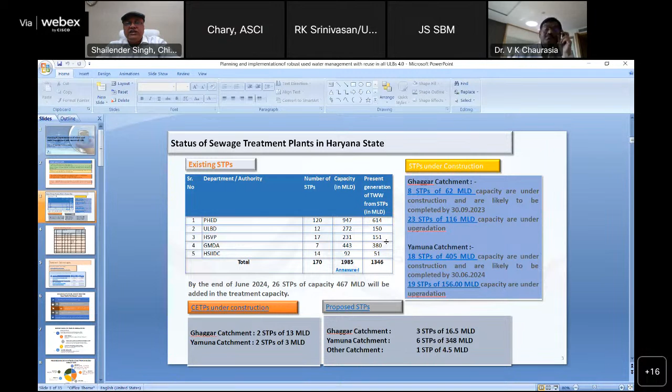We are having STPs under construction also. We are upgrading our STPs, which were earlier designed for 30 BOD, but now we are upgrading those STPs also for less than 10 BOD and other standards.

Then we have these are the standards which we are planning while constructing our STPs. The norms have been prescribed by Haryana State Pollution Control Board, and these are same as per the NGT orders of 2019.

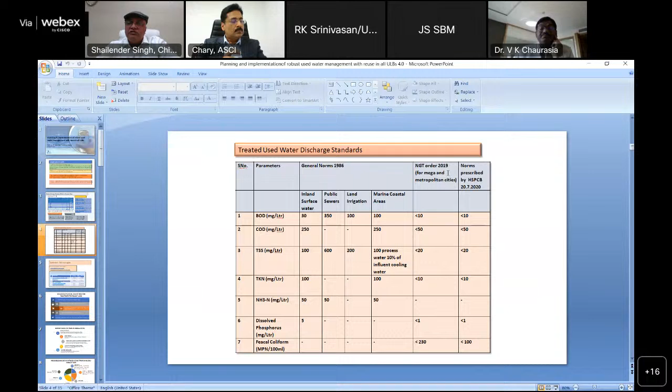This is the breakup of STPs. We are having two STPs of UASB technology, which was the old technology. Then we have activated sludge process, two STPs. Most of the STPs are of MBBR technology, and 36 STPs are of SBR technology. These MBBR technologies, since we have to use this treated wastewater mainly for agricultural purposes, so we are upgrading these STPs also.

This is the brief highlights of our wastewater policy. The aims are maximizing the collection and treatment of sewage. Second aim is to promote the treated wastewater as an economic resource. So we have fixed the charges also for wastewater supplies.

Treatment of collected sewage is done as per the prescribed standards by Haryana State Pollution Control Board. We target to treat 100% of the collected sewage and progressively increase the reuse rate to 50% by 2025 and to 80% by 2030.

Now, what is the importance of treated wastewater in irrigation? Haryana is basically an agricultural economy, and in the smaller towns, of which there are about 70, there is not much industry, so the adjoining areas are agricultural land. We are targeting to use treated water for agriculture purposes, since agriculture accounts for the highest percentage of annual freshwater withdrawals.

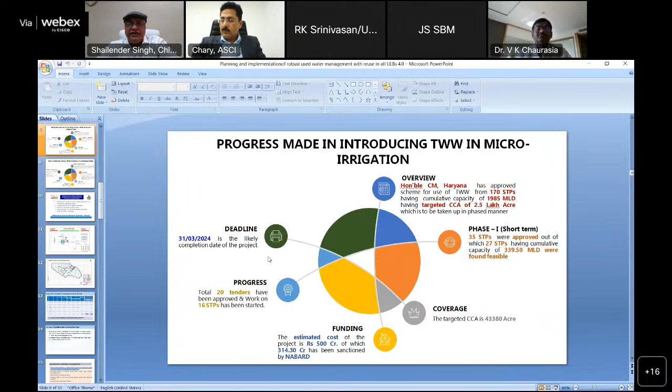In the second phase, we will take up 57 STPs, completing it by 2025. In the third phase, we will take up all the remaining STPs, with a target date of 2026. So we will be achieving our targets well before the dates stipulated in the policy.

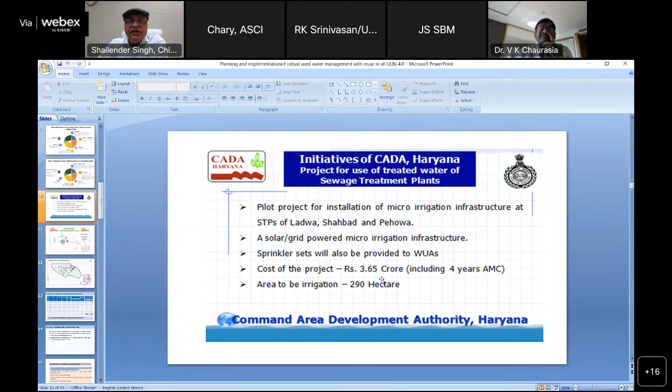There is an authority called the Command Area Development Authority in Haryana, which takes water from our STPs and distributes it to farmers through micro irrigation. A pilot project was taken up in Ladwa, Shahbad, and Pehowa, where a solar system was provided for electricity supply, and sprinkler sets were given to the water user associations. The cost for these 3 towns was about 3.65 crores, and the area irrigated was 290 hectares.

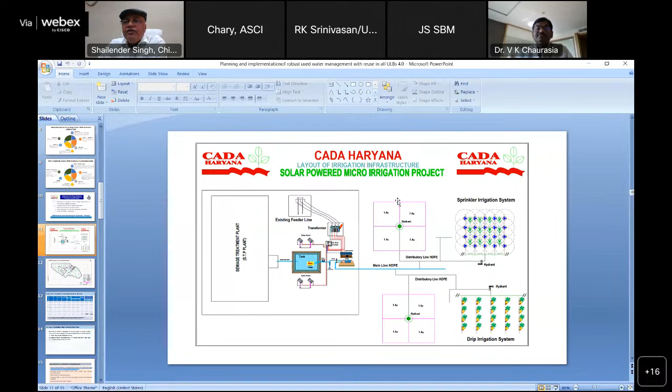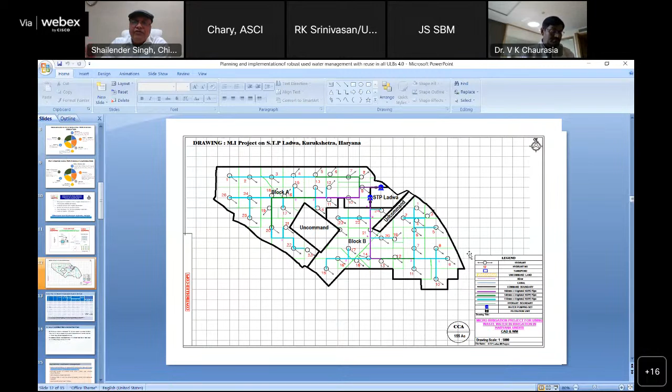This is the total command area. If we go in for micro irrigation, it is seen that about 1 MLD of treated wastewater is able to irrigate about 170 acres of land. So a considerable amount of raw water running in the canals is saved by using treated wastewater and supplying it to the fields through micro irrigation.

This is again the action plan, shown here in figures. I'll not take much time on it.

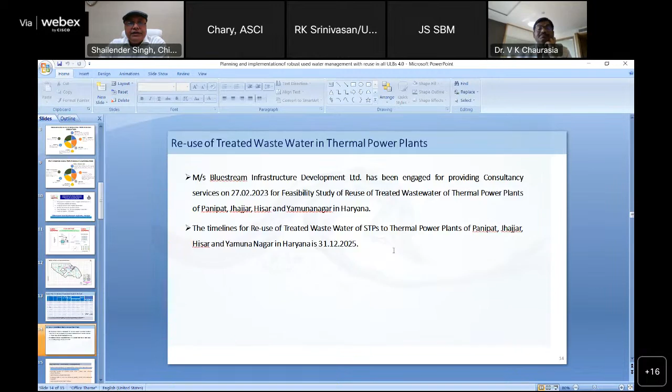Now I'll stress upon some of the key points for used water management.

Some important key points are that, first of all, we should fix and notify standards for use of wastewater depending upon its usage, as we have to identify for which purpose the wastewater is going to be used. Though the CPHEEO manual specifies that if water is used for raw vegetables it should be treated to a certain extent, and if used for industrial purposes a different level of treatment is required, these standards are not yet notified.

The state pollution control boards should come up and fix the standards for using this water, so that accordingly the STPs can be constructed. Second is ensuring that these standards are met through our STPs.

There are many challenges of O&M, and we see different kinds of influent characteristics coming at our STPs at different times. In industrial towns like Panipat, there are lots of dyeing industries, so sometimes there's green water coming, sometimes red water. So we have to monitor this influent coming into the STPs also.

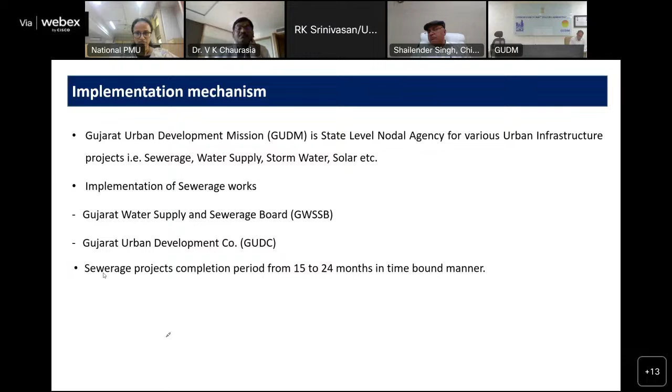In order to maintain quality control and to complete the projects within a time-bound schedule, project management consultants and TPI are deployed to observe quality controls and completion of projects in a time-bound schedule.

Planning before implementation requires demand gap based planning, budget plan, detailed project reports, drawings and estimates, resolving existing utilities issues, and statutory approvals from various authorities prior to execution, approval of projects by GUDM, and implementation of projects.

Operation and maintenance: minimum 2 years for network and minimum 5 years for STPs are provided in the estimate.

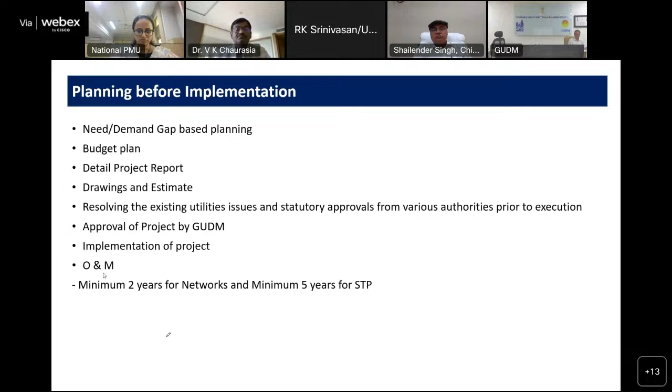Current status of STPs. Municipal corporation waste generated is to the tune of 3,268 MLD, existing installed capacity 4,010 MLD, wastewater treated 3,066 MLD. Municipalities: 1,146 MLD generated, existing installed capacity 744 MLD, and wastewater treated is 343 MLD. So total 4,414 MLD, existing installed capacity 4,754, wastewater treated is 3,409 MLD.

Commissioned STPs from year 2015 to 2023: 133 STPs of capacity 4,841 MLD. Work in progress of STPs: 104 STPs with capacity of 1,369 MLD will be completed by December 2023.

25 STPs with 990 MLD capacity will be completed by December 2024. The utilization of STP is directly linked to sewage network and household connections.

To improve collection efficiency, the government provides rupees 7,000 per sewerage connection. This 7,000 per connection is given from Swarnim Jayanti, and in addition, 3,000 is given by Government of India.

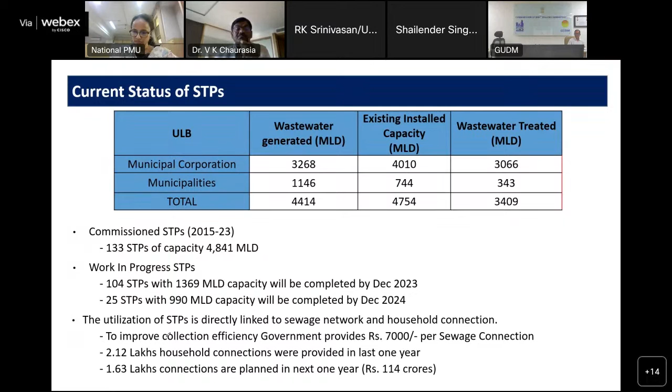So till date, we have completed 2.12 lakh household connections in the last 1 year, and 1.63 lakh connections are planned to be completed in the next 1 year.

Current status of collecting systems: in 7 municipal corporations, the collecting system has been completed and 1 is in progress. In Class A municipalities, total completed are 19 and 3 are in progress. In Class B, C and D, 126 are completed and 8 are under progress. So out of 152, work in progress is under 12 municipalities. We have covered more than 90% of the network in urban areas of all the municipalities.

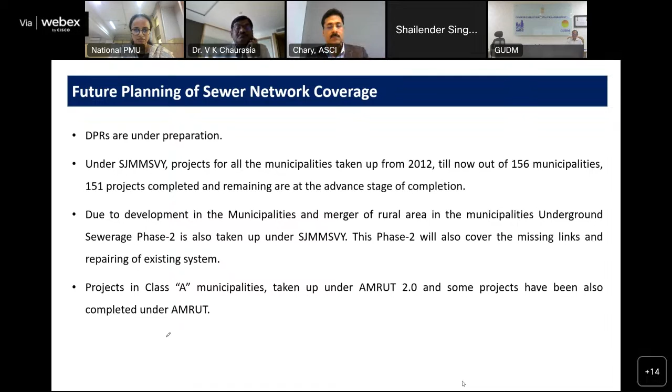The Government of Gujarat has launched a policy for reuse of treated wastewater on 28th May 2018. The objectives of the policy are to reach a minimum 80% coverage and collection of sewage in all municipal towns, to reach a level of 100% treatment of collected sewage as per prescribed standards, to reuse at least 25% of total freshwater consumption from treated wastewater within the time limit set under the policy, to reuse 70% of treated wastewater by 2025, and to reuse 100% of treated wastewater by 2030.

Thank you for giving me the opportunity to share the Gujarat experience.

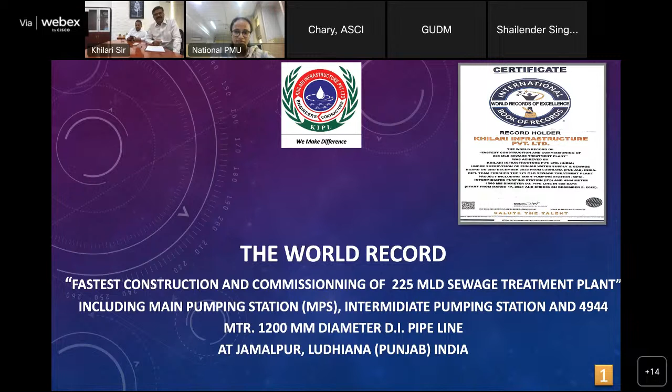The goal of this project was that the Buddha Nala, which was earlier a Budha Dariya, had become a Buddha Nala because of polluted sewage. The objective is to treat the domestic wastewater so that only treated waste and stormwater flows into it, and we get back to the Budha Dariya rather than the Buddha Nala.

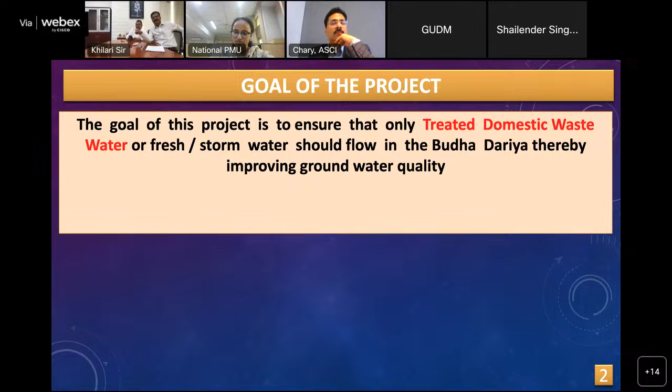This plant was inaugurated in the month of February by the Honorable CM of Punjab.

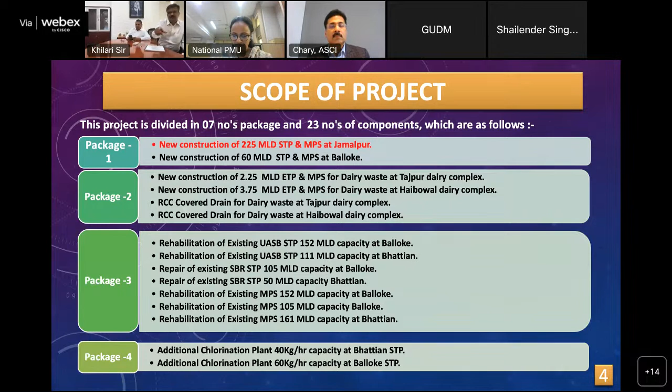These are all the packages. Basically, there are two STPs, 225 and 60 MLD, and there are other components. There is a package of ETPs. We had to rehabilitate the existing STPs also, and the chlorination system, and the package of what you call the IPS. Then again, rising mains packages, two packages of rising mains. Now, this is the main STP, 225 MLD sewage treatment plant and its components, with two IPS and the incoming sewer of 1200 mm diameter DI pipeline.

So we completed this whole scope in a record 625 days. This is in spite of the fact that this was during the COVID period.

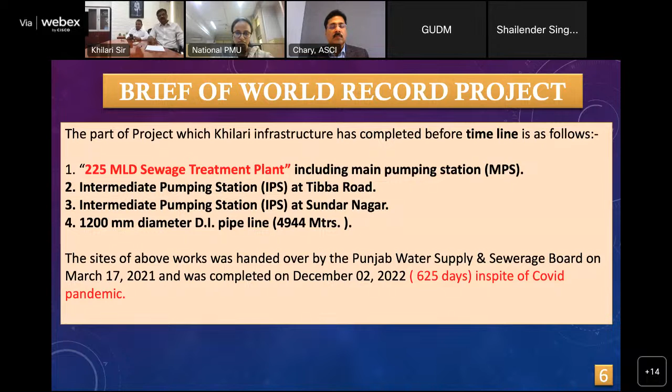So how did we achieve this 21 months target? Basically, the executing agency, PWSSB, we have been working with them for so many years, and they have probably executed around 100 STPs. So they have capable technical staff, and they were very flexible during the execution.

Similarly, the Ludhiana Municipal Corporation is also involved, as the end user. The chairman of Ludhiana Municipal Corporation is chairing the project monitoring committee with able members from various departments. The coordination and communication was so well managed because there were 5 agencies: PWSSB, Ludhiana Corporation, the technology provider, KIPL, and the consultant. All were in sync with each other, and there was no communication gap during all these 21 months.

Now, coming to the selection of technology. We have constructed around 1,000 STPs throughout the country. There is probably not many corporations who don't have our STPs, from across the whole country.

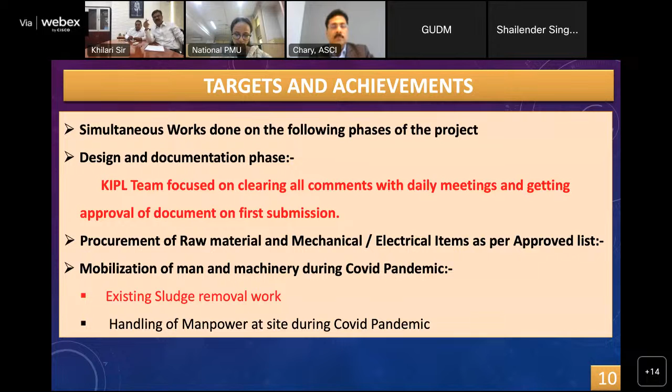Simultaneously, only 2 slides remain. We had to prepare the land development where there was a sludge of 1 lakh cubic meters, which was also cleared during this time.

Next slide. Of course, we introduced all the high-tech machinery and the whole team was incentivized. Parallel teams were deployed, along with specialized vendors for specialized equipment like the filter press and centrifuge; all the teams were invited to commission the plant and commission the units.

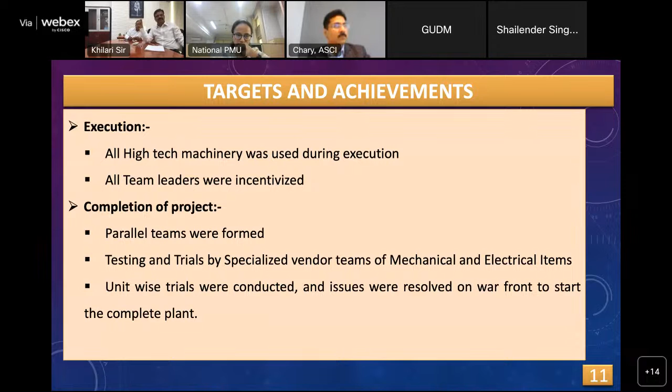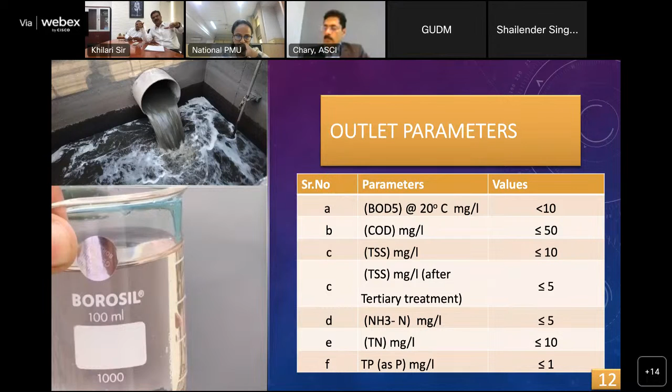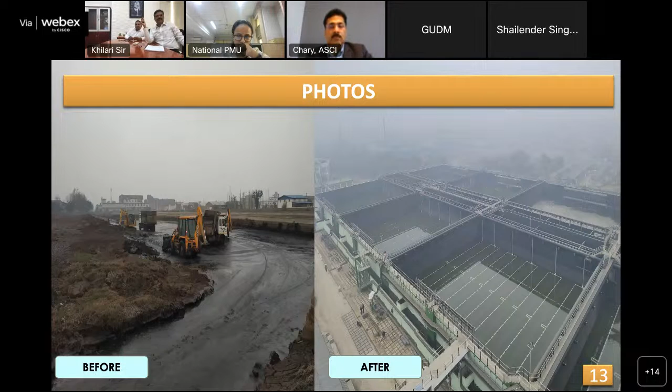This is the outlet quality - this is the recyclable quality, which is less than 10 BOD and TSS less than 5 after tertiary treatment. This is before, you can see a lot of sludge there, and this is the plant after it has been commissioned - this is the primary treatment, a huge primary treatment. And these are the final photographs.

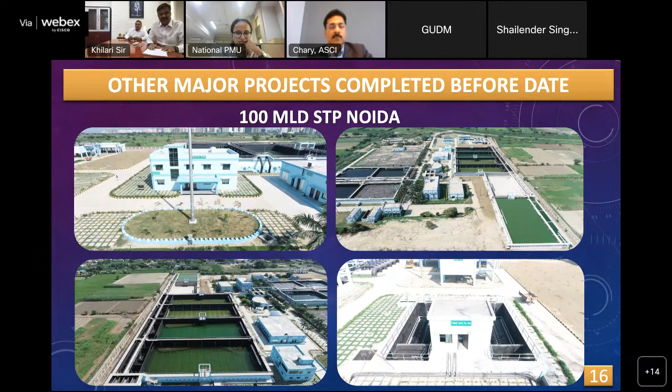Now I'd like to invite everybody to please come and see our plant in Ludhiana and see how this has been done in such a quick time. Thank you very much.

Thank you very much, Mr. Sagarao. The reason for including this project and initiative is to demonstrate that the same level of speed and acceleration is required across all the states in the country, where used water management should be taken up on a mission mode. Ludhiana has set an example of how projects can be executed in a seamless way. Thank you very much once again.

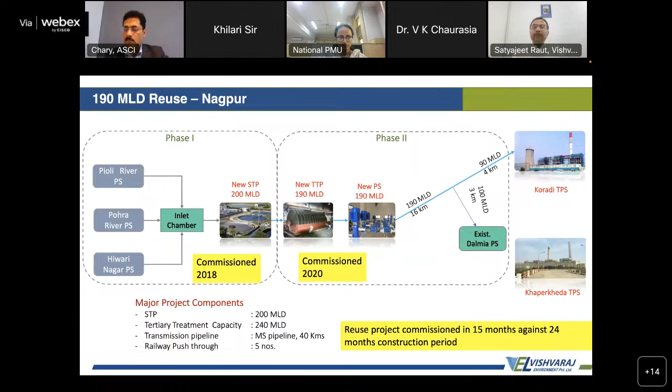Chandrapur is another city where we are implementing a 50 MLD reuse plant. It will be commissioned in another 2 months, and there is another innovation there - again a PPP, but some AMRUT grant was available, and that grant is made available to the operator as viability gap funding. It has almost become a PPP HAM model - hybrid annuity model - where 40 to 50% comes from the government, the balance is investment by the operator, and the water is sold to the power plant. So 50 MLD of fresh water will be released for the city of Chandrapur.

I think there is huge potential. This is the Nagpur model, where the private operator has done everything - design, and more importantly, financing, construction, operation, and maintenance. The entire responsibility lies with the private operator.

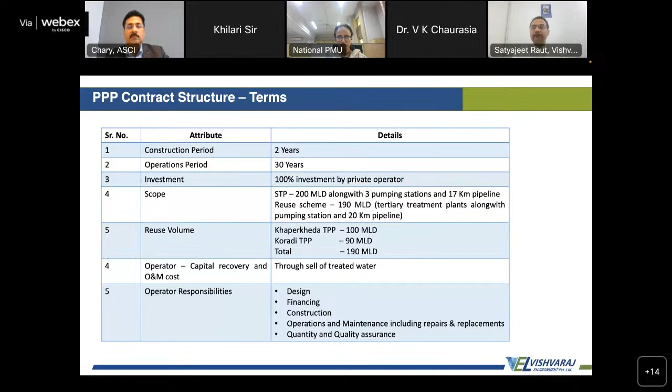Now, some key learnings and suggestions. Most important in any reuse project is to have a single point of accountability. What has happened is there are a lot of STPs already available, and what is needed is incremental tertiary treatment, laying a pipeline, and pumping it. So there are two distinct phases, and there could be two distinct operation and maintenance contractors, and then finger pointing starts. So the idea should be to bring this entire infrastructure within the umbrella of one single operator, so there is no finger pointing, especially because there is an industry using the treated water.

They are concerned about the quality and the quantity of water being shared with them. So to ensure that kind of service mechanism, the single point of accountability is very important. Experienced operator - there are a lot of people who have developed sewage treatment.

Patrick, you need to wrap it up.

Thank you, just right. So you need an experienced operator. PPPs wherever possible - we would recommend PPPs because there is skin in the game of the operator. It brings a lot of commitment because these are projects which are on a long-term basis.

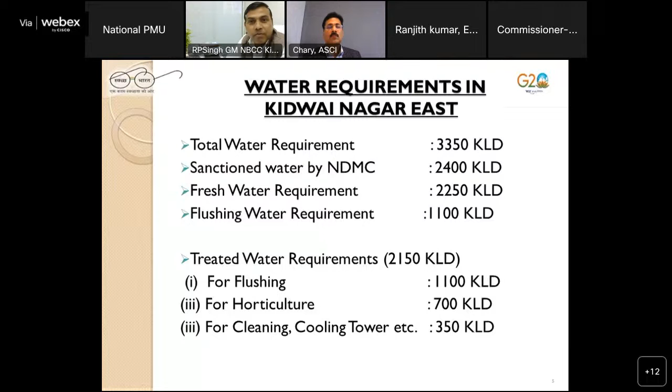This is how the water is balanced. The total water requirement of the colony is 3350 KLD, out of which 2250 KLD is fresh water required, and 1100 KLD is flushing water required. All this total water is being treated in the STP, which has a capacity of 3.6 MLD.

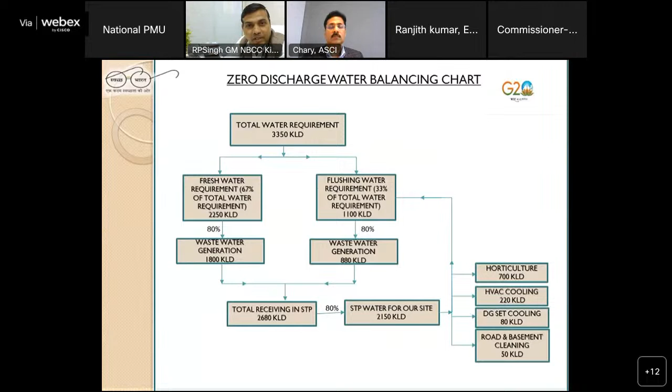The water requirement for flushing as well as horticulture, HVAC, DG, and road cleaning comes to approximately 2150 KLD, which is fulfilled from this. This is our STP plant description.

Our STP plant is based on the SBR technology. One important point to share: according to the layout of the colony, we have placed STPs at three locations to reduce the length of the wastewater line as well as the irrigation lines, in order to reduce the capital cost as well as the running cost of the colony.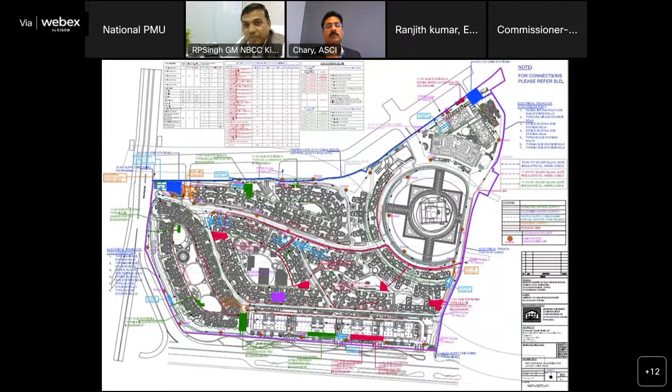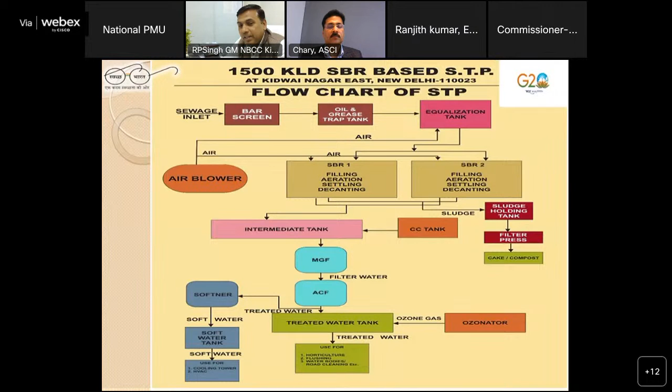This we have discussed. This is the STP diagram. We have tertiary treatment also for the air conditioning as well as cooling tower. We treat the water for softening and use it in the air conditioning plants.

Case study of this plant: this is a redevelopment colony. During the redevelopment, we approached NDMC for the freshwater requirement. NDMC raised a query regarding the fulfillment of the water demand.

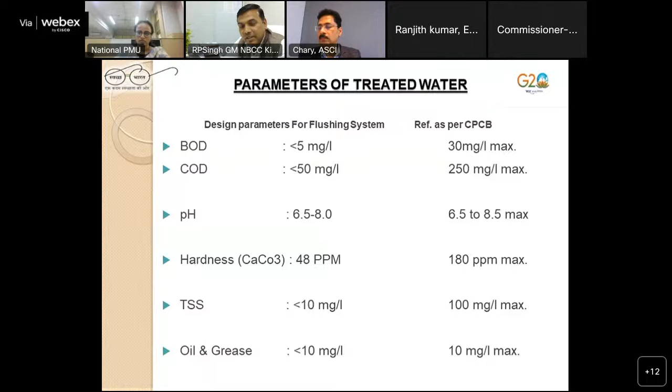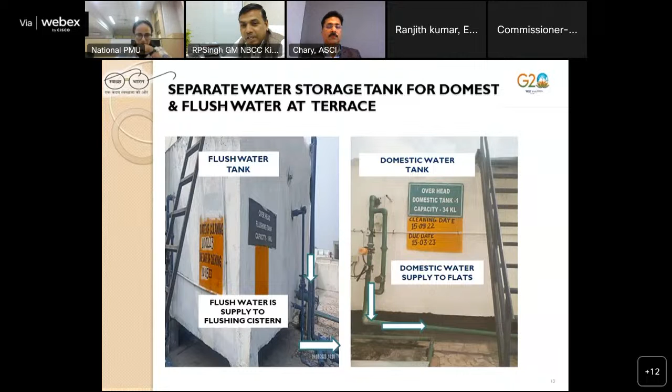So we have placed this in our system design. This is the separate flushing water system as well as the supply water system, and storage. This is the irrigation system - we are using the treated water there.

One of the most important aspects of the colony is the total precipitation of rainfall. We recharge the underground water through these rainwater harvesting pits. The RWH system is based on the Crosswave technology.

Crosswave is a polypropylene-based modular system for underground rainwater harvesting and recharging systems, assembled by systematic stacking. The staggered structure design offers inbuilt stability and security, while the module design ensures adequate water recharge and infiltration along with storage. Each RWH system has 30 cubic meter capacity and 40 KL per hour to 60 KL per hour infiltration rate.

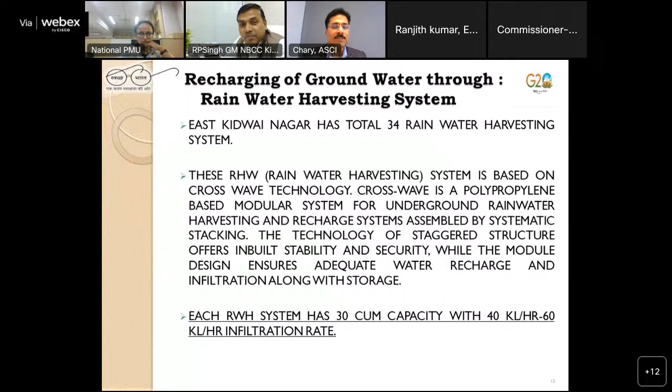Mr. Singh, you need to wrap it up. Just wanted to check with you - your initiative, your colony, is a zero liquid discharge colony where everything gets recycled, am I right? Sir, in this colony, the total water we use is recycled and used. The total rainfall falling over the area of 86 acres is recharged.

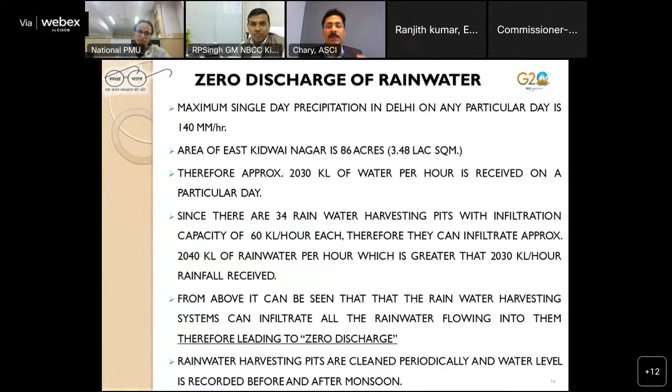Friends, this is a very unique case. We heard about cities doing recycling. Here's a colony which is not only capturing rainwater, but the whole colony is a zero liquid discharge colony, like an industry - we have ZLD industries, and here we have a ZLD colony where all the wastewater, used water, gets recycled for various applications. I think this is an amazing story, and all cities should encourage their resident welfare associations and colonies to emulate the experience of Kidwai Nagar, and if possible, visit and cross-learn from each other. Thank you very much, Singh Saab, sorry I had to rush.

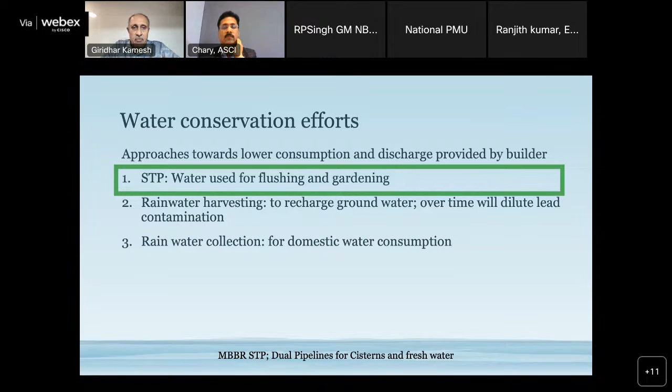So if you see this building, it's essentially a residential building. It's got 108 apartments, each about 3,000 to 3,800 square feet, totaling about 3.71 lakh square feet. Each are super premium apartments, and the garden area is not very much.

It's 25,000 square feet. This building is about 5 years old, and our STP capacity, which was given by the builder, was about 150 KLD, but that was seriously oversized for our apartment. So we had to change the MBBR system to an EAS type of technology. We spent about 3.5 lakhs collected from the residents to upgrade this.

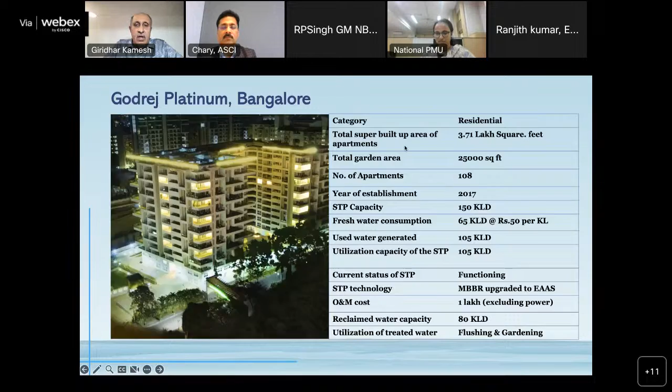So this is the water balance, how it works in our apartment. If you look at it, we have roughly freshwater intake of about 65 KLD, and we are reusing about 40 KLD. The net of 105 KLD, some of it does go to drains. There's no option, but 40 KLD is reused out of this.

The most important thing I want to point out is that for flushing and garden use, there is a dual pipeline system installed with all the cisterns, and that ensures there is no question of cross-contamination of drinking water with this water at all. This is used only for gardening and flushing. That's a very important feature where we are ensuring everybody's health is maintained well. I think that's very unique to our apartment.

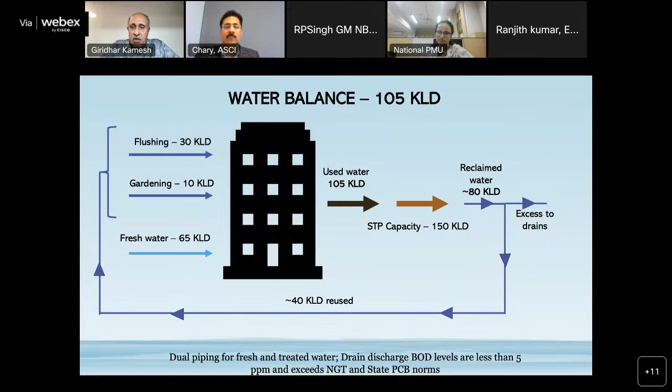Now, the important thing I want to show here, the takeaway is very simple. This was our per household consumption, which is close to 85,000 liters per quarter per household. And this was the consumption happening some time back, up until Q4FY2021.

Then in 2021-22, we actually commissioned this STP. We made these changes and commissioned it. After commissioning, I think this is a very important story - you can just see how much it has dropped, and it is dropping continuously because we are finding new ways to reuse the water. That is the crux of the whole story that I have.

The other thing we have is we are now wanting to do rainwater collection for domestic water consumption. While that's an ongoing study, we do have a provision with 2 underground sumps, with a total capacity of 150 kiloliters, out of which at least 75 kiloliters is reusable. So I think we are working on this, and that's it. Over to you.

Thank you, Mr. Giridhar. I think, friends, you saw the graph - the per capita consumption has systematically reduced, primarily because of less reliance on fresh water and replacing the flushing and gardening requirement with treated used water, which is a phenomenal demonstration of the effort of the building community. In fact, the civil society has come together and introduced and deployed their own resources to bring this change.

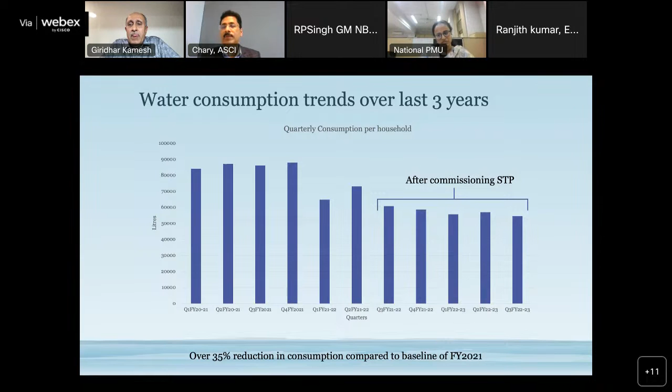Thank you very much, Mr. Giridhar. And finally, we have with us Mr. Shekhar Reddy, who was earlier the president of CREDAI, and also closely associated with the Indian Green Building Council. He's going to speak about his own experience introducing net water neutral buildings and how we can move towards a net water neutral situation with a focus on used water. I have seen his buildings - it's all green. A lot of used water gets recycled in his buildings. Over to you, Mr. Reddy.

Thank you, Chary Garu. Madam, can I get a slide? Keep it for 3-4 minutes maximum because I'm overshooting the time, sir. Sorry about it. Madam, can I get the slides? You can straight away go to the 5th slide. Pujaji, is it possible to put the 5th slide? Yes, sir, I'm just sharing. You can skip the first 4 or 5 slides. The case study slide you can keep.